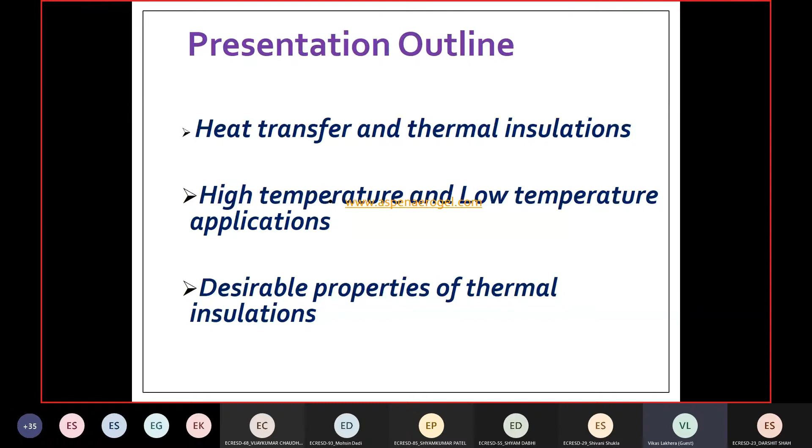This is what we all know as Fourier's law of heat conduction. Usually whenever you have a wall and you want to reduce the heat being transferred, what you need to do is play with the thermal conductivity, because the cross section area is fixed, this is a wall, you cannot do much about it, and the temperatures of the ambient and the fluid are also sometimes beyond your control. So what you can practically do is play with the thermal conductivity.

If you see this equation, you can write it as Q equals delta T upon delta X. Delta T is the gradient which is actually working here. So delta X upon K times A, this part is your thermal resistance. This is something which you like to have. If you are working as an insulator, you would like to have this higher, so that the heat...

You would like to play that role. So insulations basically work like this: the thermal conductivity is reduced as much as possible so that the resistance part increases and the heat transfer reduces.

We all know that gases have the lowest thermal conductivity, and air is something which is freely available, its conductivity is around 0.026 at room temperature. So this is the thermal conductivity of air. Most insulation materials actually make good use of air pockets.

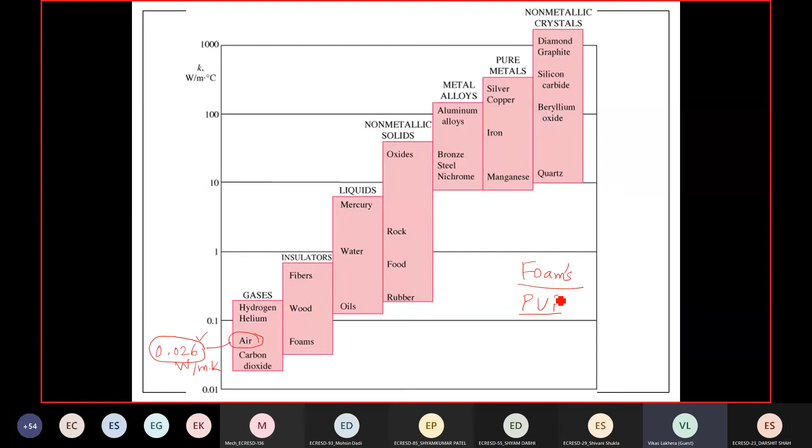If you see some of the insulations we usually use, like foams. Foam is a very popular insulation material, or PUF, known as polyurethane foam. In refrigerator doors and such, we usually go for foams, and they have a structure where you fill some gases like a refrigerant as a foaming agent. Again, gases have very low conductivity, and they are filled in plastic, you can say the base is plastic spheres in which the pocket has the refrigerant gas filled.

Because of this, foams have a very low value of K. So this is essentially using air. On the higher side, when you go for materials like wood or water, the conductivity increases.

At the same time, when you are using these foams, you have to see that there is no open structure. If the structure of the foam is open and the cells forming the foam are not perfectly closed, then water can get into this. Water's conductivity is around 0.5, so from 0.02 you are simply increasing it to that order. This is where in the application of insulations, you have to ensure that water does not get into the system.

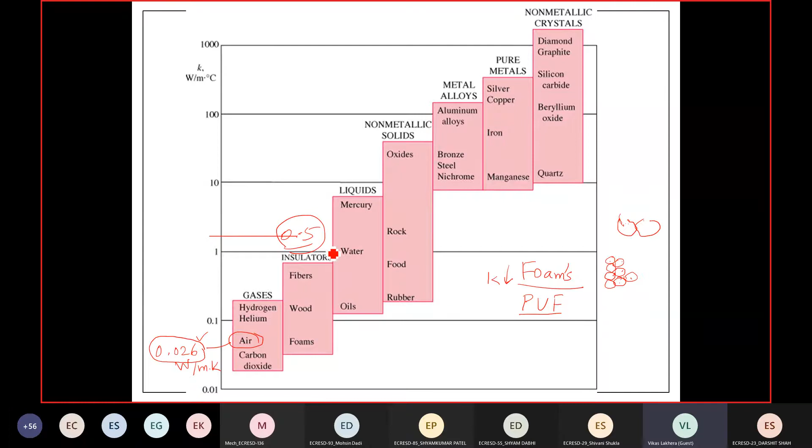This is what we were just talking about. So you have diamond, which is the highest, water around 0.6, and air around 0.02. Your foams, which have a conductivity of 0.026, principally owe this to the presence of air or pores wherein air or other gases are present. This leads to the low conductivity of the material. But again, if the structures are open, water can get into it, and that water will actually increase the conductivity of the material.

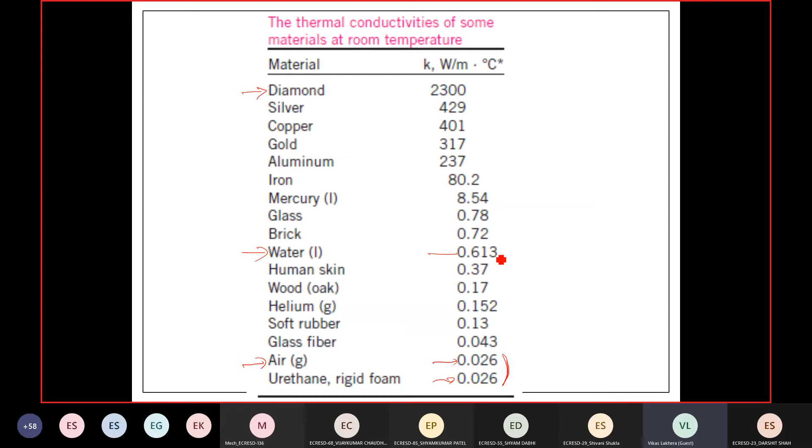So we all know there are three modes of heat transfer. Within a material, all three modes could be working at a time, depending on how the fluids are placed and how the structure is. So even radiation can sometimes play a role.

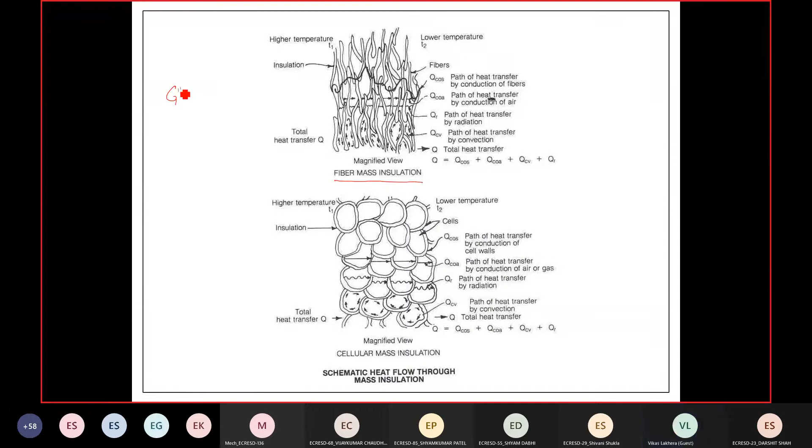So here, if you look at the structure of an insulation, take a fibrous insulation like glass wool or mineral wool - these are all fibers, basically a kind of blanket. In between the fibers you have gaps. Here there will be a combination of heat flowing wall to wall through heat conduction, plus some amount of conduction and convection through the air in between, and then heat propagates like this. So actually in any heat transfer happening in an insulation wall, you have a combination of convection, radiation and conduction. Your overall objective is to reduce all three modes through this cross section.

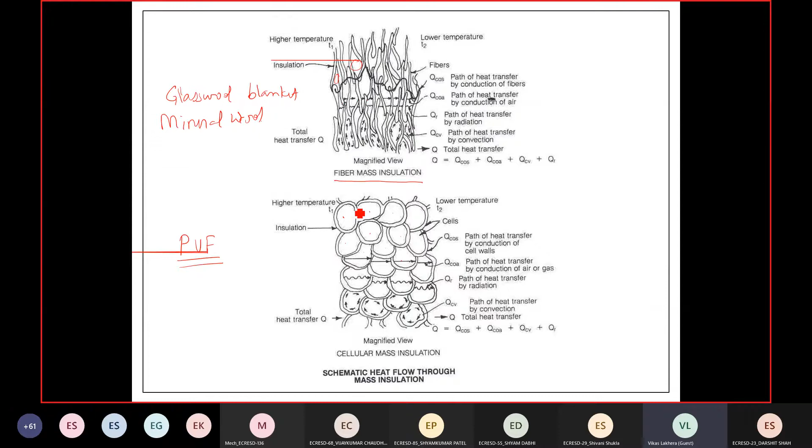So this is for a fibrous mass insulation like a glass wool blanket or mineral wool. And this is something you go for with a cellular material like PUF, polyurethane foam. The foam structure is something like this - these are the cells actually formed by the chemical structure of the PUF, which is a kind of polyurethane structure. Within it, some kind of gas is filled in between, used as a refrigerant or foaming agent, filled in this kind of structure. If these pores get opened up, again you have the problem of water getting into these structures. So if it is a close-knit structure with fewer open cells, the structure is very compact and it will not be as prone to heat transfer compared to an open type of structure.

So insulation materials, basically you can have inorganic material. Inorganic includes things like perlite, ceramic fibers, mineral wool, cellular glass - these are all inorganic materials. Then you also have organic materials, which can be natural or man-made. In the organic category you have foams like polyurethane foam, then PIR foam, isocyanurate foam, and something we usually use on our human body, like sheep's wool - that's a natural organic insulation. Then you also use cotton. So these are all the organic materials which are used there.

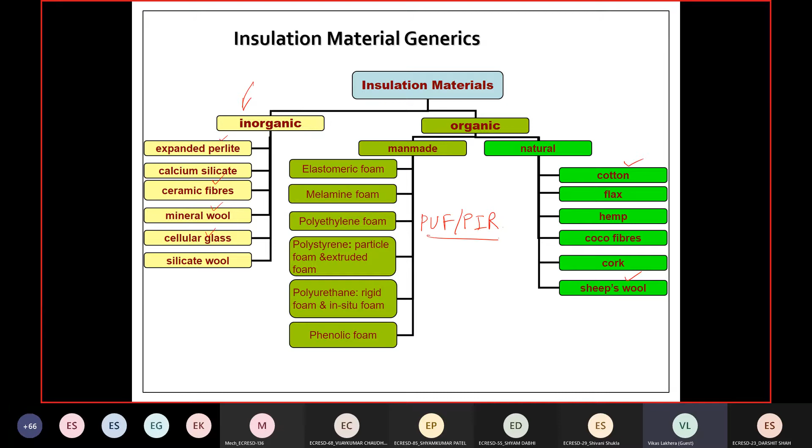Here, if we talk of the properties, one of the most important is the thermal conductivity. We use the word 'effective' because it is not only the thermal conductivity of the solid material. It is also because, as I told you, in this structure the overall heat moving is a combination of heat transferred through the fibers as well as the air and other gases which might be in between.

So it is not just the conductivity of the material per se, but it is also due to the combination of the paths which are formed, and the overall thermal conductivity is also what is known as the effective thermal conductivity. So it is not just the thermal conductivity of the solid material, but the whole insulation wall, which comprises of not only the solid fibers, but also the gaseous elements. So we use the proper word in case of thermal insulation as effective thermal conductivity.

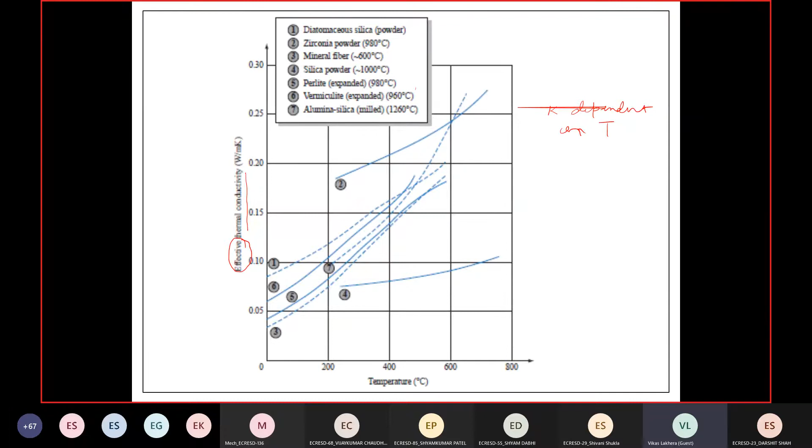So insulation may not just have one purpose. Thermal insulation, you may have the purpose of say heat reduction. So you can use it both ways. It can be for cold insulation, and it can also be for hot insulation.

So these both applications may be differing. In industry, you may find some of the cryogenic systems where you require cold insulations, and you may also have the steam lines and the steam going to the high pressure turbine. So all those are the hot insulation where you require to maintain the temperature of the fluid inside the pipes. So this is again you can have different types of applications where thermal insulation may be used.

Also another application of the insulation is in acoustics. Say for example the airports, or the theaters. So there you may use the acoustic insulation, for example near the airport. So if you are inside the airport, you may not feel the kind of noise which actually the airplane makes on the airfield outside. There are so many airplanes landing and taking off, but still within the airport premises you don't feel it because of the insulation which is used.

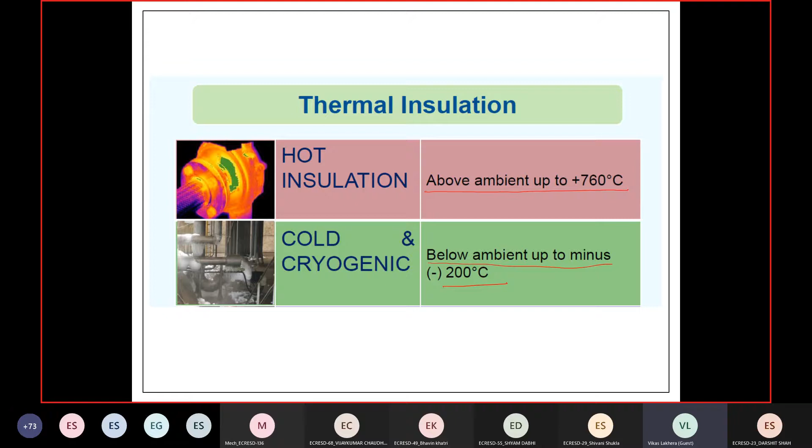So as I was telling you, you can go for thermal insulation. Usually hot insulation is above ambient, and you can go up to 700 plus temperatures. And if it is cold and cryogenic, you can go for below ambient, up to minus 200. These are typical ranges, but of course they are only indicative ranges.

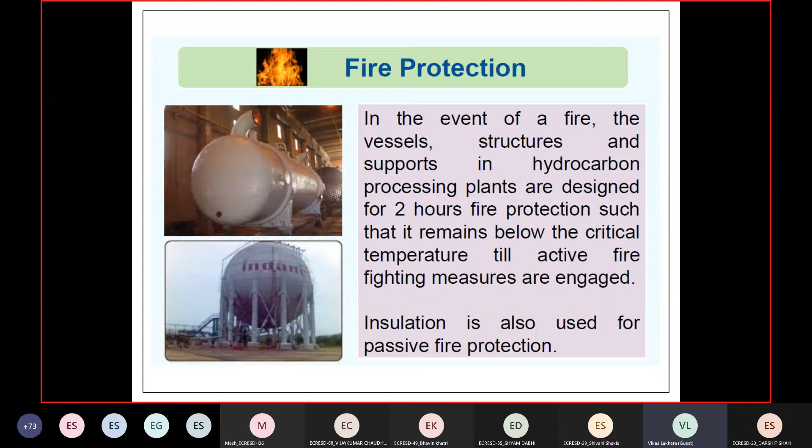For fire protection, in the event of a fire, your vessels, structure, and supports should be designed for at least 2 hours fire protection so that their critical temperature is not reached. Otherwise, before the firefighters come, the structure should never reach the critical points, otherwise there can be disastrous results. So insulation is very effective in that kind of passive fire protection.

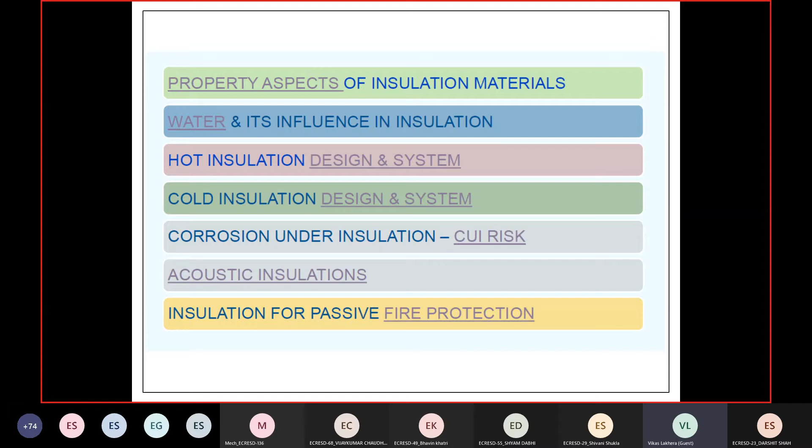What is important is the property aspects of insulation material, what water can do. As I told you, water's conductivity is much higher, maybe more than 20, 30 times that of air. So it will cause very disastrous results if it gets into the system. You have to see that water is not getting in the system. Air conductivity is around 0.026 and water is around 0.6, so between the two you have a factor of around 30 times.

So this is something you have to see: if you are designing a system just with air pockets, the cellular structure, if water gets into those structures, it can lead to a lot of heat transfer, and your entire thermal management will fail. Then you have special characteristics for hot insulation and cold insulation.

Another important aspect which people often miss is the corrosion aspects. This is important because once you have placed the insulation, you will not open it in the lifetime of the insulation. Maybe you will open it after 5 years, 10 years, when the insulation has become old and you want to replace it. At that time you might find certain properties like corrosion under insulation, known as CUI.

This is very risky and can lead to corrosion of the wall. Typically, if austenitic steel is there, and the amount of chlorine or sulfur content in the insulation is not appropriate, it can cause the wall, especially metallic walls, to corrode. This is an issue because you will not know unless you open the insulation, and once put in place, you usually do not open it periodically, even for cleaning. Unless the insulation is bad and has collapsed, we do not usually replace it. But because it is hidden, it can silently cause corrosion.

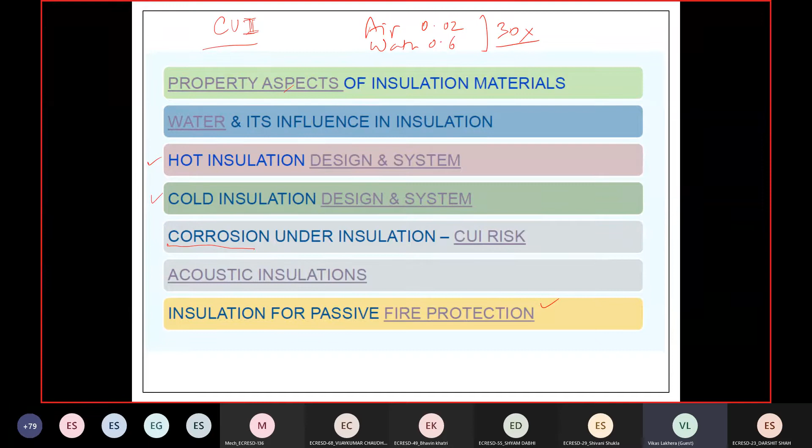Here the design objectives: one is energy conservation, that is the prime thing, and the logic is simple. If you have a pipe, and over the pipe you put the insulating wall, you are creating additional resistance. So the value of overall heat transfer coefficient U will be affected because of the presence of the wall. But at the same time, you have to see that Q is equal to U into A into delta T.

So if you are using a thick layer of insulation for a pipe, the area is also increasing. If you are having a very effective insulation, suppose instead of using this, insulation type 1 has say 10 centimeter wall thickness, so delta D is 10 centimeter, this thickness is say 10 centimeter. So what you have done, your outer area is increased because of this.

Suppose for the same wall temperature, you are able to maintain delta T the same using only say 2 centimeter wall. So if your thickness here is just 2 centimeter, this area will be much larger as compared to this area. Even though wall temperatures outside of the two surfaces are the same, for the pipe, this material, type 2, requiring only 2 centimeter, is able to create the same thermal resistance as a 10 centimeter wall because of having a very low thermal conductivity.

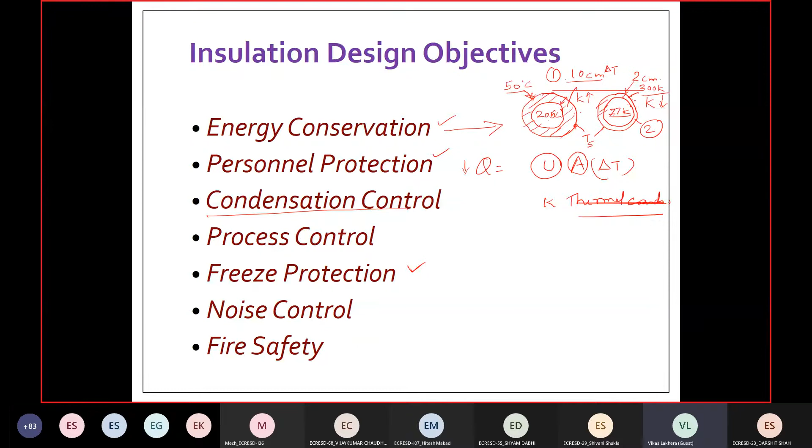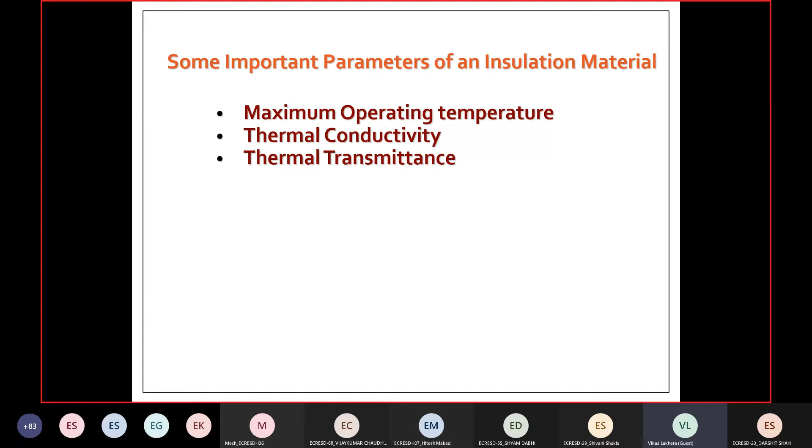So what are the important parameters of an insulation material? One is the maximum operating temperature to which an insulation can be used. Then the thermal conductivity of the material, and thermal transmittance. Thermal conductivity and transmittance, though they are linked, are not the same, because here you also consider the overall factor. So when you are taking U into account, you talk of the thermal transmittance.

Otherwise, you're only taking K. As you know, the overall coefficient depends not only on K, but also on H, that is the convection coefficient. So you require to consider that. Then the water vapor permeability, how much the insulation is permeable to the water vapor.

Usually the water vapor will have a gradient. Say if you are taking a cold storage, for example, this can be a very severe issue. Suppose on one side of the cold storage you are maintaining a temperature of minus 20 degrees, and on the outside ambient you may have a temperature of say 25 degrees.

So this is ambient and this is cold storage. The water vapor on this side is at a different gradient as compared to the other. So there will be a movement of the water vapor from the plus side to the minus side. So how much the wall is permeable to the water vapor is a very relevant property, especially for cold storage.

So what will happen is, if water penetrates the wall of the cold storage, then the water's conductivity is say 0.6, and you have designed the whole wall considering the insulation to be effective. So your load for the cold storage is designed as per that. But now water has entered, and water will replace the air pockets inside, which were earlier having a conductivity of 0.02. Now the water has replaced it, and the wall has become conducting.

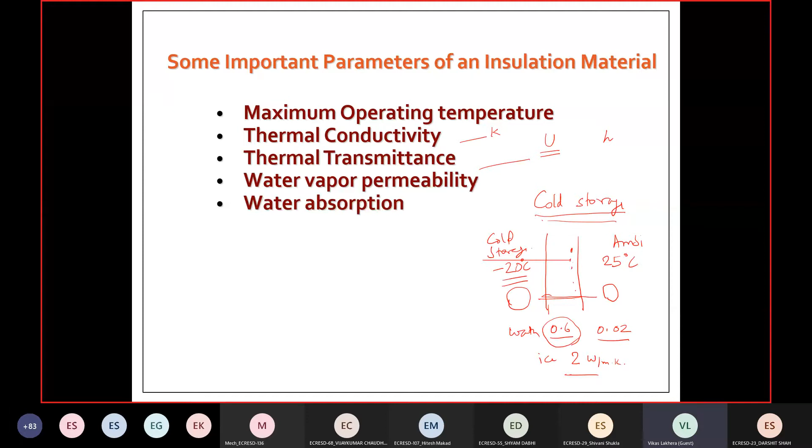How much absorption of water takes place? So absorption of water is again, as you can understand, important.

Fire resistance, we just talked about it. Smoke properties are also important, because when an insulation catches fire and burns, it produces very toxic smoke, and that toxicity, especially in residential and this kind of buildings, can have very serious repercussions.

Then the compressive strength, because usually in cold storage and other structures, you will have a whole wall created of the insulation material. So these walls will have a load, and this load will be of compressive nature. If the insulation is not very strong, its compression properties will not be sufficient, so you should know how much compressive strength it should have. It is good to have a good compressive strength, especially when you are using it for buildings where loads will be coming into it.

Resistance to vibration and jolting becomes crucial, especially in automobiles and those kind of structures. Say for example, you are using it in trains. Trains are continuously vibrating.

So the railway bogie, the air conditioning coach is there. Usually to reduce the air conditioning load, you use insulation in the walls, so the whole wall of the coach will have insulation in between. So there will be insulation here. Now this is continuously vibrating, because the train is moving, so it will always be vibrating.

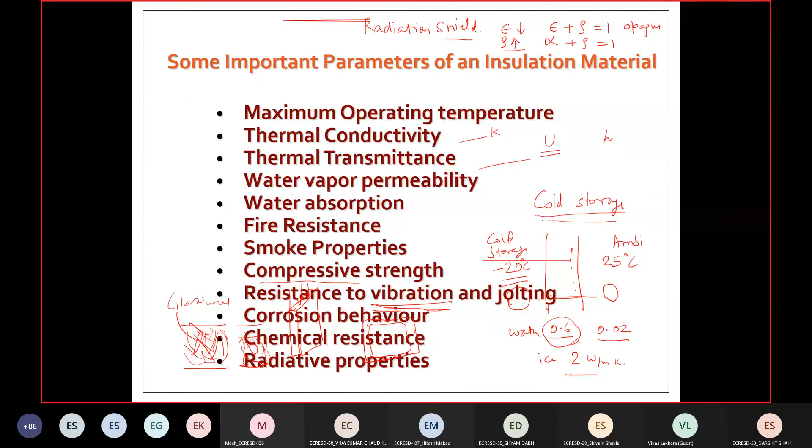So if you talk of the various properties of the material, you have the thermal properties, physical properties, chemical properties, moisture properties, combustibility properties. These are very relevant and you need to appreciate this. Again, it will also depend on the application. For different types of applications, you may require different types of properties.

You see, water absorption may not be very critical for high temperature application. Why? Because even if water gets into the system, since you have a high temperature fluid inside the wall, the water will eventually evaporate out.

So this is something which is very crucial for cold insulation. How much water vapor gets in, how much water it is absorbing, is very crucial for low temperature insulation, because once water gets in, it will not be able to come out, and it will freeze and become ice and start highly conducting. But in the case of high temperature application, if water gets in and the temperature of the fluid inside is 150°, the water will eventually evaporate and come out. So you only have to see that there are enough path lines available for the water to come out.

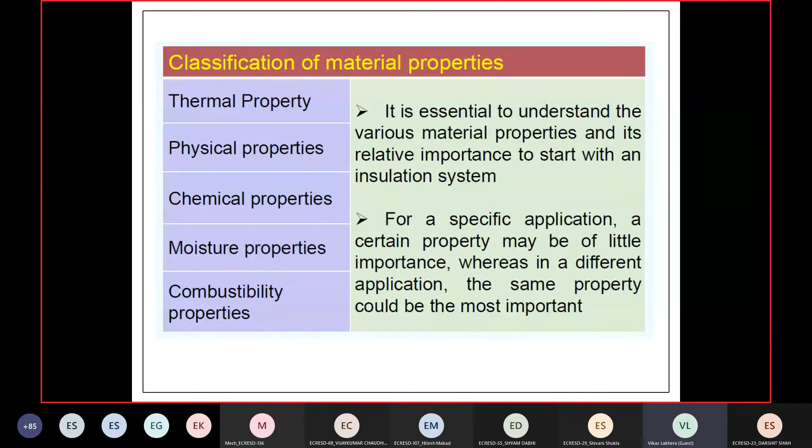So likewise, other properties are also very relevant, and depending on the application you have to consider them. Your thermal properties include temperature limits, thermal conductivity, and how much it expands. That is also important, because if you are putting it on a pipe, the differential expansion and the expansion of the thermal insulation you have put are also very relevant.

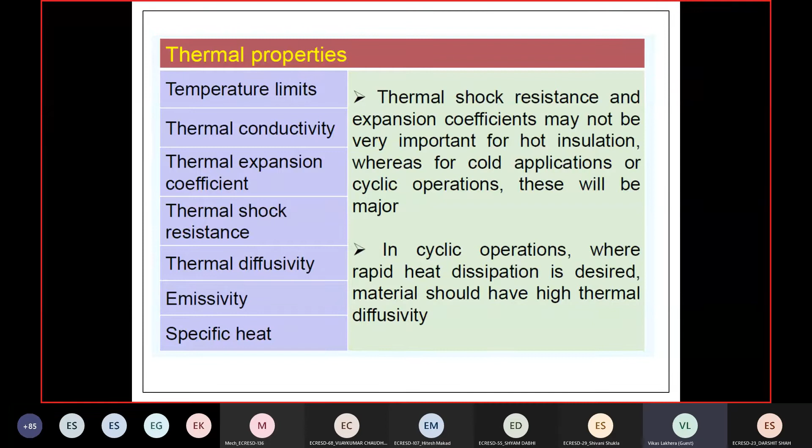Thermal shock resistance, thermal diffusivity—so how fast it is able to come down to its original temperature, and how fast it wants to cool down, that is related to the property called thermal diffusivity. Then the emissivity of the surface, again related to reflectivity, and the specific heat. So these are some of the thermal properties we look for.

Similarly, if you talk of the physical properties, it is how many open and closed cell structures are there. We just talked about the open and closed cell. It is relevant because that is how the path lines are decided inside the insulation. Then whether it is fibrous or rigid, its resilience, resistance to vibration, tensile strength, flexural strength, compressive strength. Flexural strength is something related to breaking.

Suppose you are having a sample like this, and you are having a load in the center, for example, and it is like a structure like this. At what load will it usually have sagging? So when you load it like this, it is under flexion. At what load will this bend and break? That is known as the flexural strength. So in some cases, depending on the way you apply the insulation, this may also be relevant along with the compression.

Then chemical resistance includes what is the pH value, leachable chloride, because that is what leads to corrosion. Then moisture properties: how much water vapor it is transmitting, what is the water repellency, water absorption, and the hygroscopicity—how much it is able to absorb moisture from the air. So all these things determine the moisture properties of the insulation.

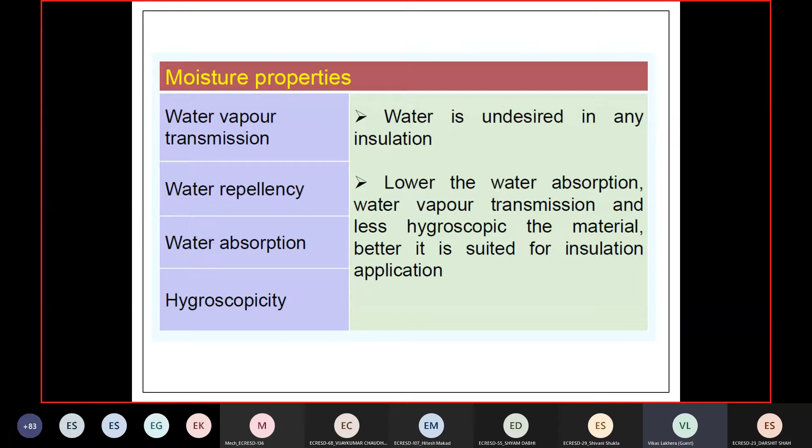As such, we all know that water is not desirable. Then flame spread index—in combustibility, this is how fast the flame spreads in the material. And the smoke and its toxicity—how much smoke it is developing, whether the smoke is toxic or not, how fast the flame is spreading, and whether it is self-extinguishing. You fire the insulation, and if you stop the fire, the insulation should not promote the fire, it should not burn itself down. So if the self-extinguishing property is there, that is a desirable property in the insulation.

So even if one section of the insulation catches fire, it should not promote or propagate, it should not go ahead, and it should not burn down the whole structure. So it is very important to have a self-extinguishing property and a low flame spread index.

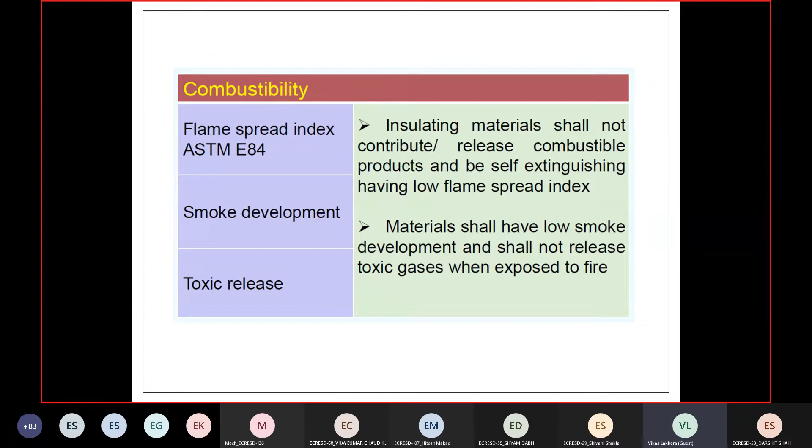So today, these are the normal insulation materials. What we were using is glass wool. Similarly, you have mineral wools. Mineral wool is a very generic word, so glass wool and rock wool are both a part of that. Then you have ceramic blankets, usually used for very high temperature applications like furnaces. Why? Because glass wool and mineral wool usually have binders, and these binders are volatile.

Once the temperature goes to 600, 700 plus, the binders will evaporate, so this material will become loose. So glass wool and mineral wool blankets will actually lose their strength once you heat them up too much, because these binders will become volatile.

So ceramic wool blankets are usually used in furnaces. You see it is a white color blanket, so they are usually white in color. And if you open the door of a muffle furnace in your lab, you will see that there is a ceramic blanket inside. This can very easily go up to 1000 plus temperatures.

And then on the cold side, we usually go for polyurethane foams, PUF, PIR. These are some of the insulation materials which are very widely used at low temperature. You can also use glass wool as such, though on the closed cell structure, the PUF and PIR are very popularly used. These all have conductivity in the range of 0.02 watt per meter Kelvin, so the PIR foams are usually having 0.02.

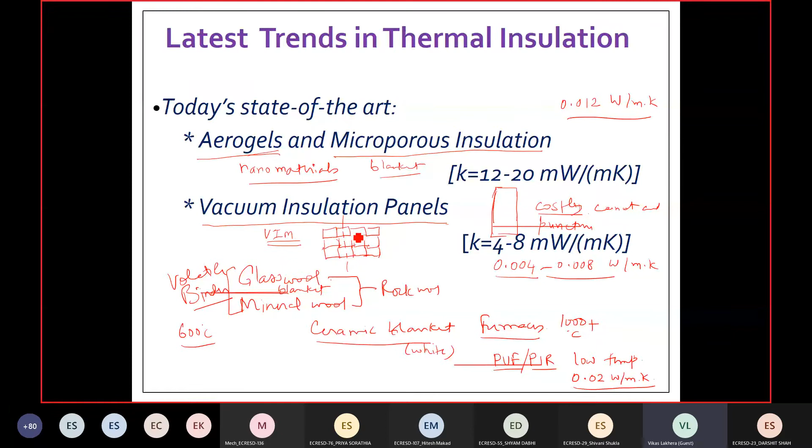So right now they are trying to work it out. For example, instead of having a single panel, you can build a modular structure, so if you want to cut it, even if you cut it here, the structure remains intact. So you can cut it also, only some part will be lost, but the entire structure will not fail. This is what they are calling vacuum insulation material. So instead of a whole single panel, you can have small structures within, and these you call vacuum insulation material. You can cut them without breaking the whole panel if you cut it partially.

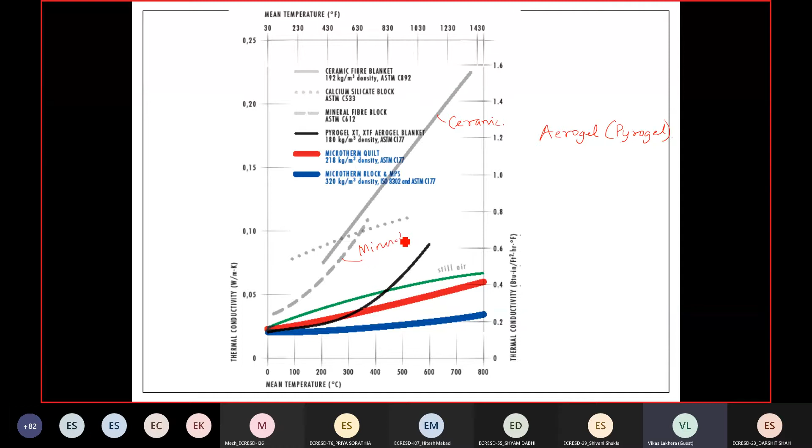This is the ceramic fiber blanket, and this is the mineral fiber which you usually use, like your glass wool and rock wool, so this is your mineral wool. And this is your aerogel. This is what is microporous insulation. Microtherm is a trade name, and it's actually a microporous insulation.

Microporous insulation is also a kind of nanomaterial like aerogel. Aerogel was first developed by a company called Aspen, and slowly other companies also got into it. Aspen was developing this mainly for NASA applications, and later this technology became more commercially applicable. Aspen's spin-off labs were developing this for NASA applications, but nowadays many companies are making aerogels, and it is commonly available for commercial applications.

You can use it in jackets. Its conductivity is very low. As compared to your conventional wool, which has a certain conductivity, suppose you are working in the temperature range of 100 or 50 degrees. At 50 degrees, its conductivity is here, whereas the conventional mineral wool is here. So it is almost half, or in that range. So if you require a thick layer of mineral wool, with aerogel you can work with a smaller layer.

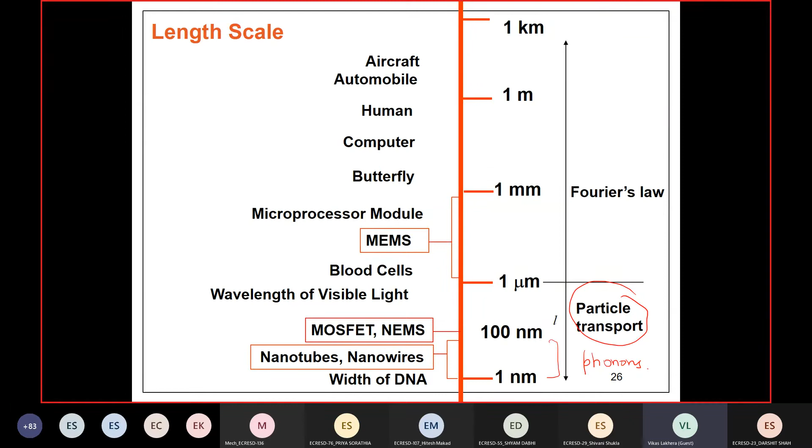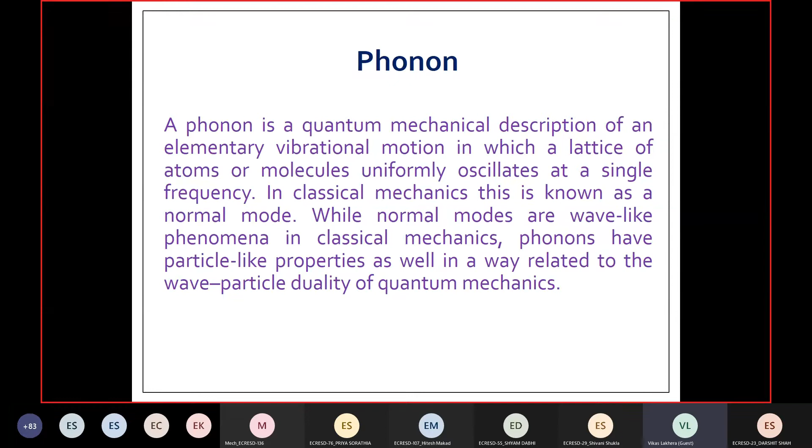In this range you have what is known as particle transport, working through what is known as phonons. At this structure the rules of physics change, and the energy transferred is also through the phonons. The lattice structure vibrations can be viewed like a particle, and also like a wave. This particle-like behavior in phonons, and the vibration continuously happening along the lattice structure - a phonon is actually a quantum mechanical description of an elementary vibration motion in which the lattice of atoms or molecules are uniformly oscillating at a single frequency, as shown here.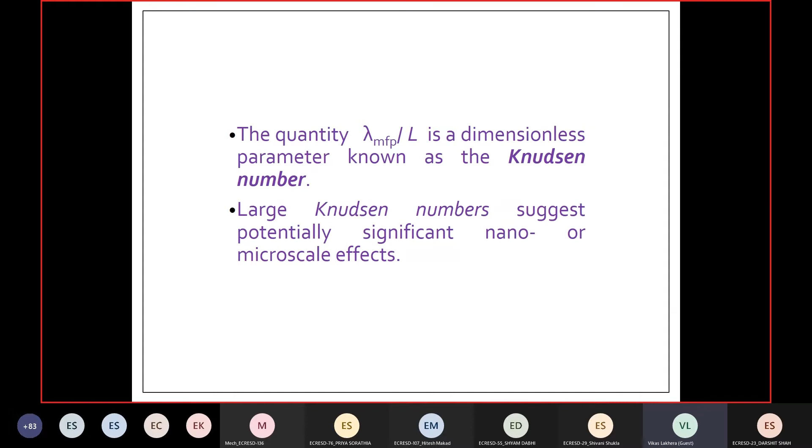In the case of a thin film, there will be a mean free path. In this case the mean free path will be small, so in this case it will be larger as compared to the length here, which is very small as compared to the length here. So this is where the effects of nanoscale come into picture, and the mean free path lambda divided by the dimension L is what is known as the Knudsen number. If you have a large value of Knudsen number, it means you are potentially working in the nano or micro scale effects, where the physical boundaries change in that structure.

The kinetic theory suggests that the thermal conductivity expression is given by this, where this is the lambda mean free path. If you can manage this lambda of the mean free path of the phonon, then you can lower the thermal conductivity. This is what is used in nanotechnology, and this is what you are doing when creating aerogel or microporous insulation - playing with this mean free path, and once you reduce this, your conductivity also reduces. So if you want to control or increase K, you should increase this lambda, the mean free path of the energy carrier - that is how you control thermal conductivity, and this is what aerogels do. Otherwise, the lowermost limit is constrained by the mean free path of the air molecules. But you can go beyond that by using micro or nanoscale effects.

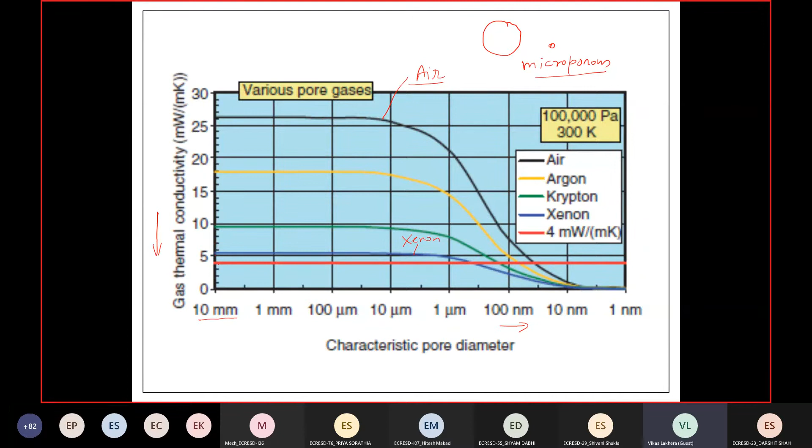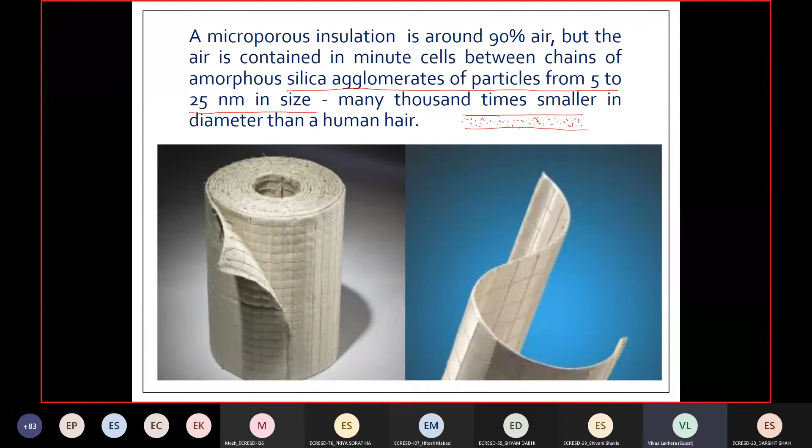So what they do is use a fabric like this, and in this fabric you have all these 5 to 25 nanometer size silica particles in which the air or gases are trapped. This is what is known as microporous insulation. Of course, the techniques required are very specialized and not available easily, that is why this is costly. You can use it up to a temperature of around 1000 degrees, and they are very flexible, so you can create it like this.

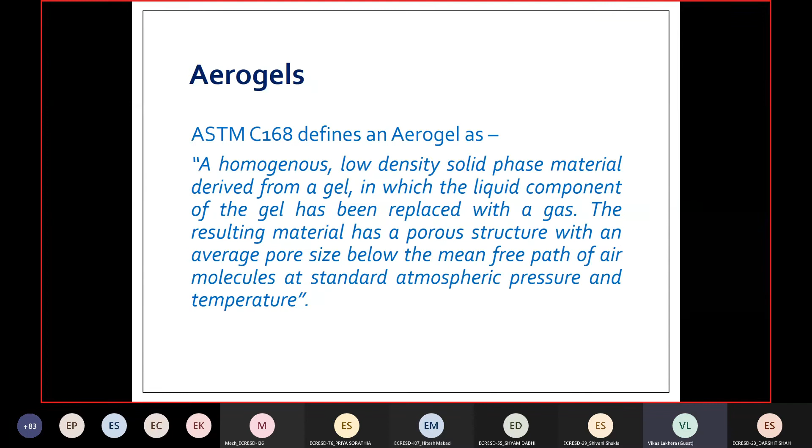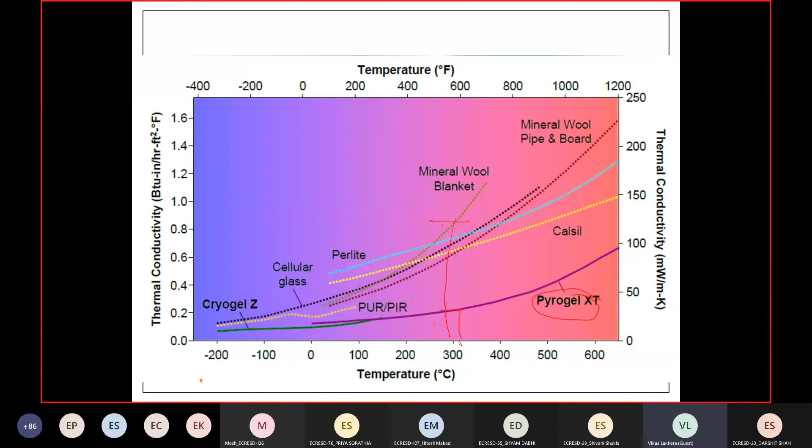So this is how the characteristics are: your pyrogel is here, and this is what the conventional mineral wool blanket you are using would be. Compared to pyrogel, you can see how the characteristic of the insulation is - if you require this much thickness of mineral wool, you can work with this much thickness of pyrogel instead. So there is a lot of reduction in the outer diameter of the pipe. Especially in pipes, it is very effective because your outer surface area will be reduced, since that is where you are losing heat. So even though wall temperatures are the same, the area of the outer cross section is going to be lower when using pyrogel as compared to mineral wool.

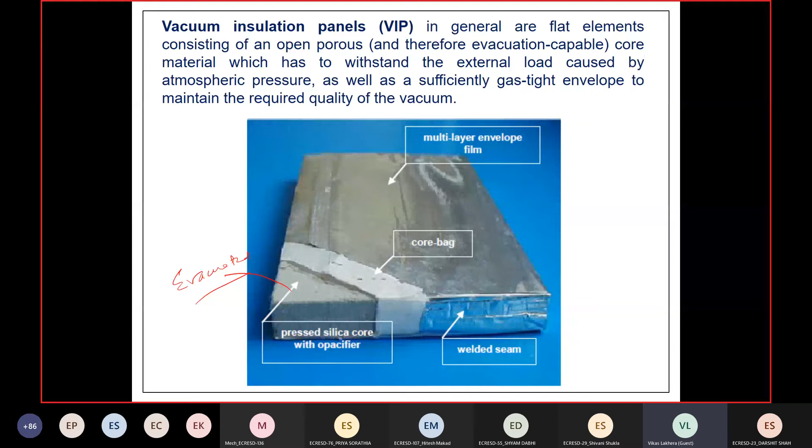This is the range of conductivity you are able to get: around 0.004 watts per meter Kelvin. That is almost 10 or more times lower than the lowermost you can get from other insulations. So vacuum insulating panels, though costly, perform very well.

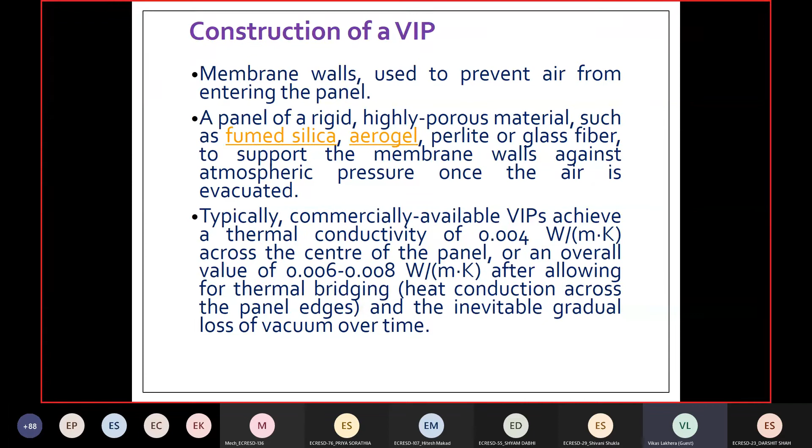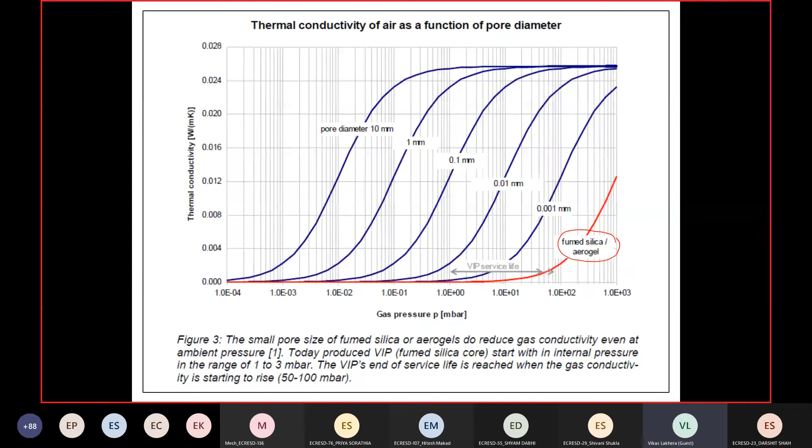Water is something you don't want - you now know why. It promotes corrosion, increases energy loss, and reduces thermal efficiency. So you don't want water to get into it. Thermal efficiency usually reduces drastically because water in cold insulation ultimately forms ice.

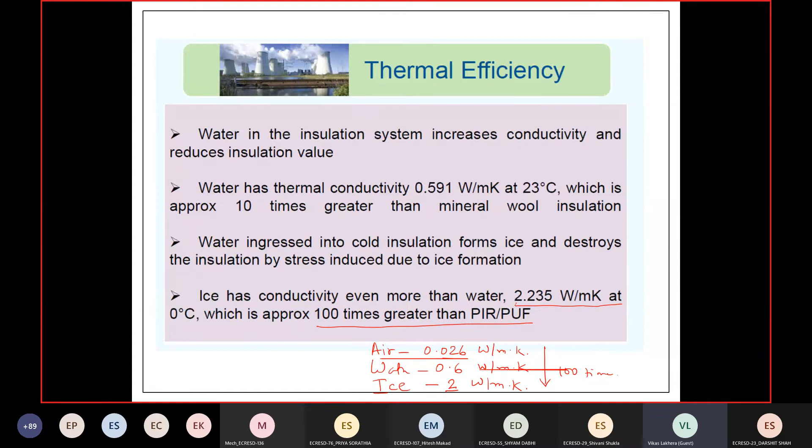This is where you have to ensure water is not getting into the system. If water gets in, the conductivity increases, and the walls start conducting heat. If it's cold insulation, you require a higher refrigeration load; if it's ambient conditions, you require a larger air conditioning load.

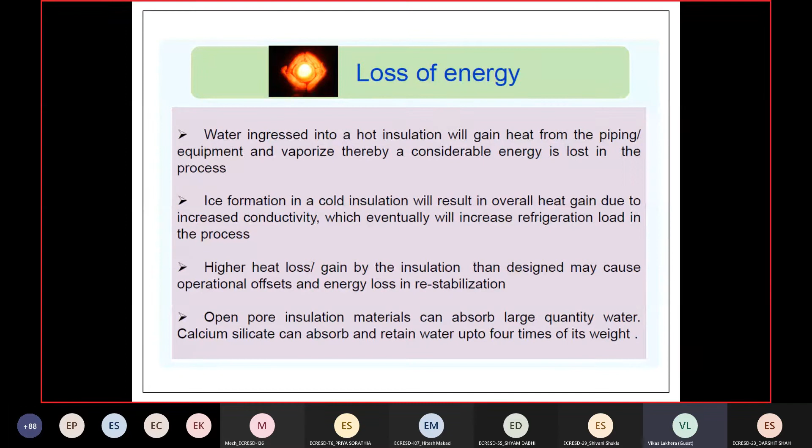This is why you don't want corrosion under insulation - as I already mentioned, water promotes that, and alkali and other things will also promote it. For hot insulation properties, the objectives are energy conservation, process temperature control, and personal protection. Here water entering is not as important, because at high temperature the water will evaporate eventually.

But in the case of cold insulation, this is a very important thing. The other thing you have to take care of in hot insulation is leachable chloride, which will actually cause corrosion under insulation. This is a very important part you have to ensure.

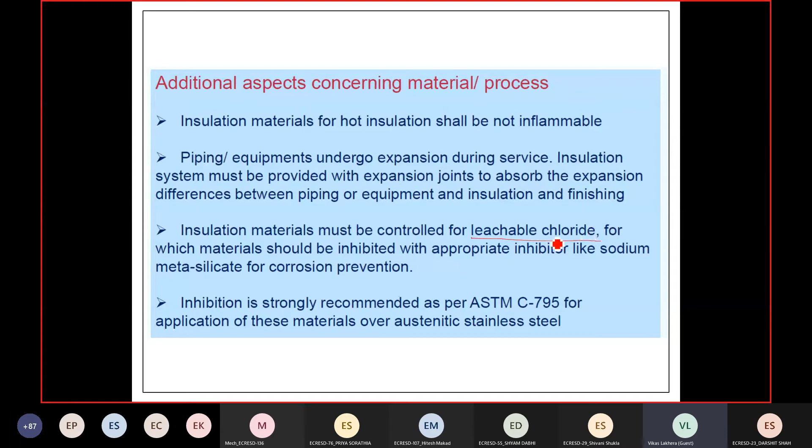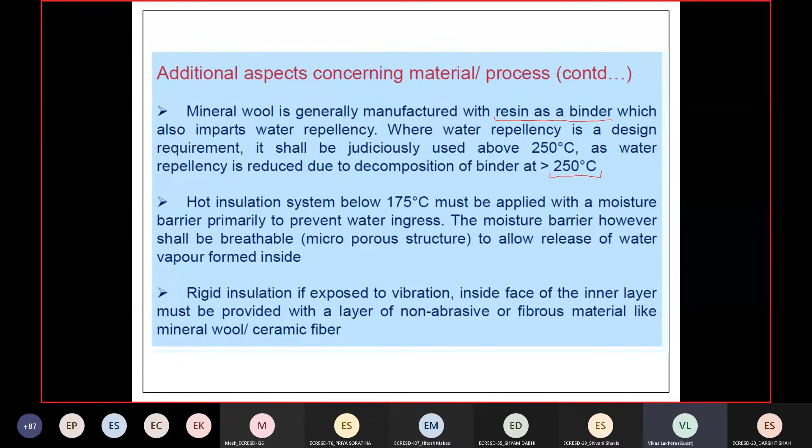The other thing is mineral wool, which usually has a resin as a binder, and this is a volatile material. As the temperature goes above 250 degrees, these volatile binders will evaporate, and the whole wool will become fluffy. There is a way how they address this - I'll tell you briefly.

This is how you work out the effective insulation thickness. If you increase the layer of insulation, the cost of the whole thing will go up, but your energy loss also reduces as the thickness increases. Eventually you have to see how much cost the heat losses bear to you, and find the break-even point where for a particular thickness you get the lowermost overall cost.

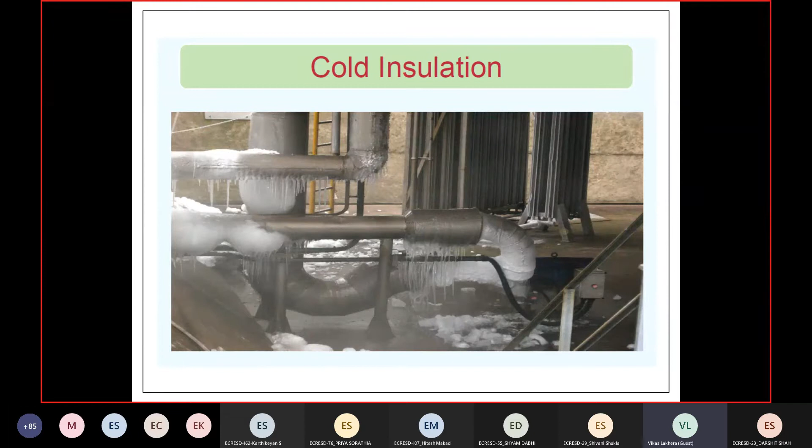Then these are some of the additional things. We'll skip this part, cold insulation - you just got the idea about it. In cryogenic systems you will use it. Here your objective is basically to conserve the refrigeration, control the boil-off rates and temperature of the processes, prevent surface condensation and ice formation, and of course provide personal protection from cold burn.

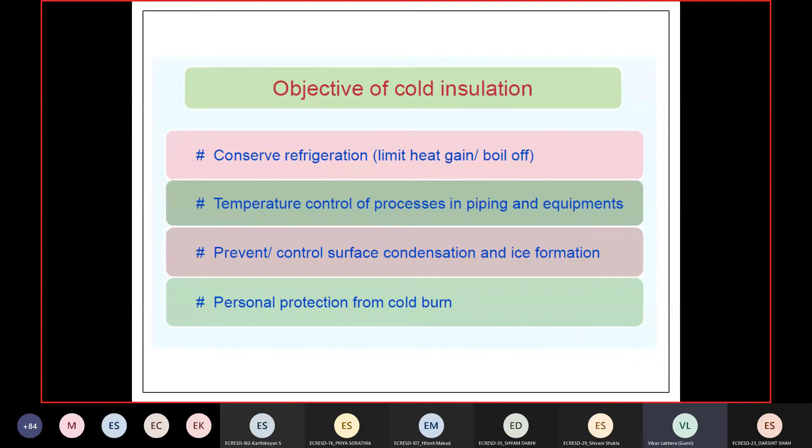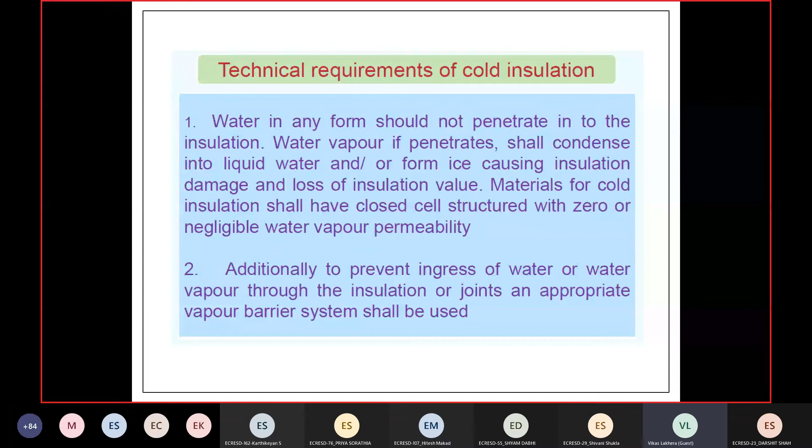So here what is most important is that water should not get inside your insulation, because if water gets inside the insulation it will definitely damage it, and how it does that we already discussed. So you have to ensure that nowhere is there a problem of water seepage. Also, piping and equipment in cold service will undergo contraction, and some part may be under ambient conditions, so how relative expansion and contraction take place is very important.

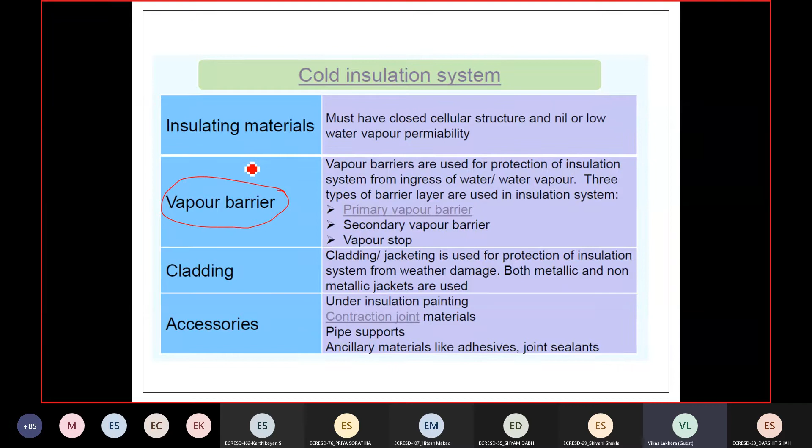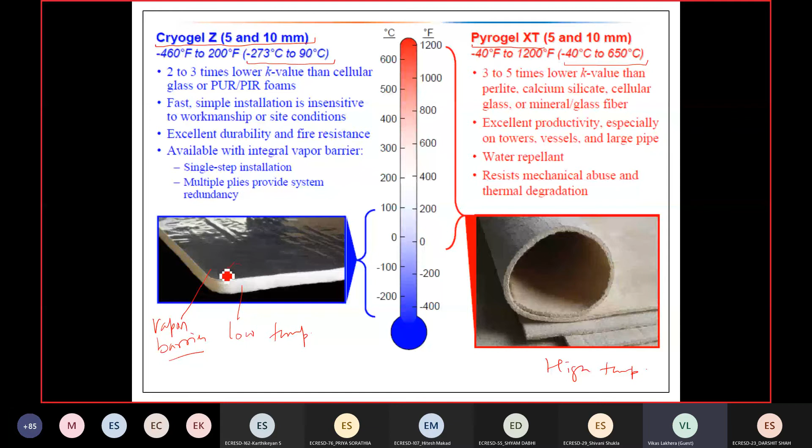So the cold insulation system usually also requires what is known as a vapor barrier. This is one of the very important parts of cold insulation. As I just showed you here, this is the vapor barrier you have put. This is cold insulation with cryogel. You don't want moisture to get in, so you have used this as the vapor barrier. Though in hot insulation it is not there.

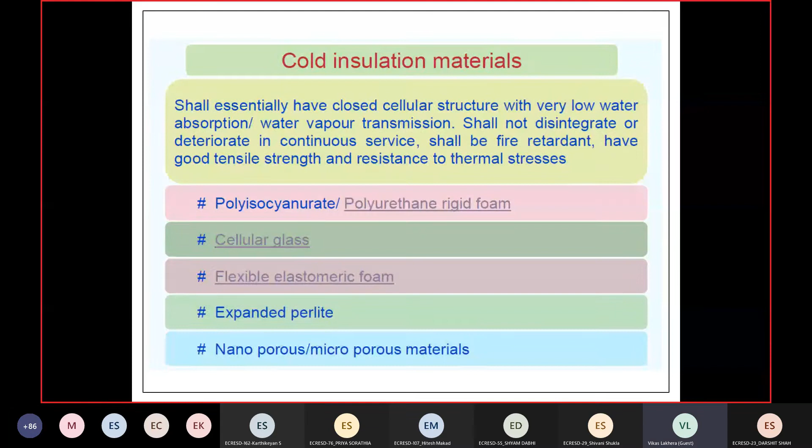So CUI, just as I explained to you, this is how corrosion under insulation happens. Okay, fire protection, very important. I'll discuss it briefly in the case of some applications, how fireproofing and fire protection is important.

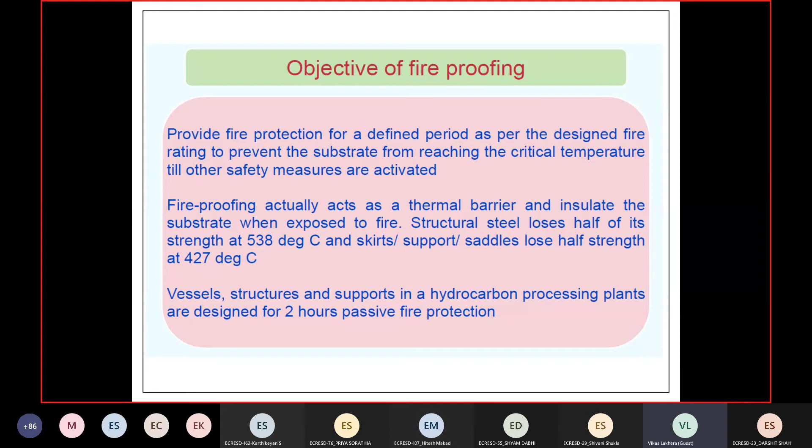So what you can actually do in this case, also in hot insulation the same thing applies. When high temperature happens, suppose a pipe having 550 degrees Celsius, if you put mineral wool, the mineral wool has its binding material or volatile binder. This binder actually keeps the blanket in proper shape. This zone is known as the burnout zone, because in this zone the volatile material will evaporate. So over a period of time this whole thing will lose its strength. So though you have put the mineral wool blanket here, over time it will become loose because of the high temperature.

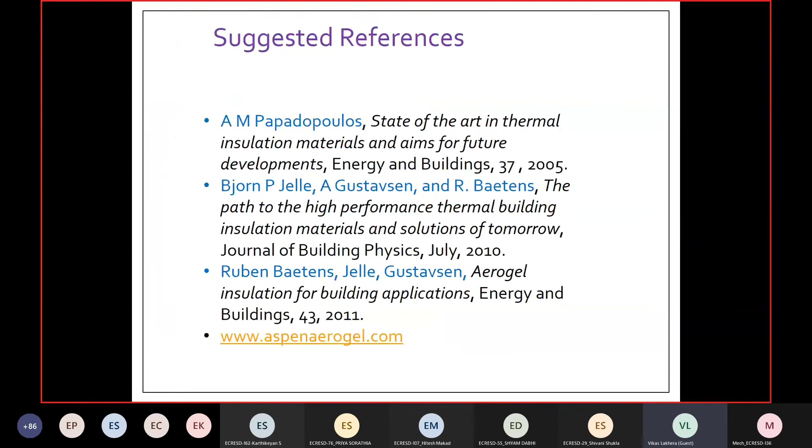So this is something we can conclude for today's session. I'll have some 2 or 3 small videos which I will share with you after the conclusion. So one thing is that thermal insulation materials are the key tool in designing and constructing energy efficient, energy thrifty systems.

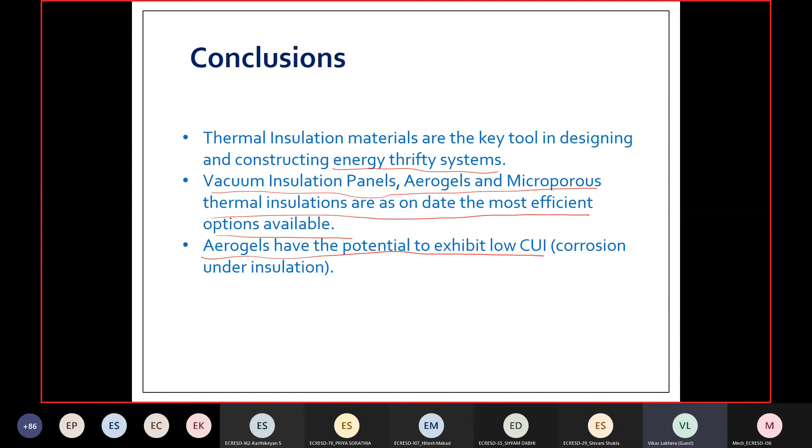The vacuum insulation panel, aerogels and microporous insulation are, as on date, the most efficient options available. Aerogels have the potential to exhibit low corrosion under insulation, and they are very sturdy. So this is something we can conclude from this session, though they are expensive. Aerogels are expensive, but how you can optimize, I already told you.

So let us see some of the videos before we close, and I'll come back to some quick questions afterwards.

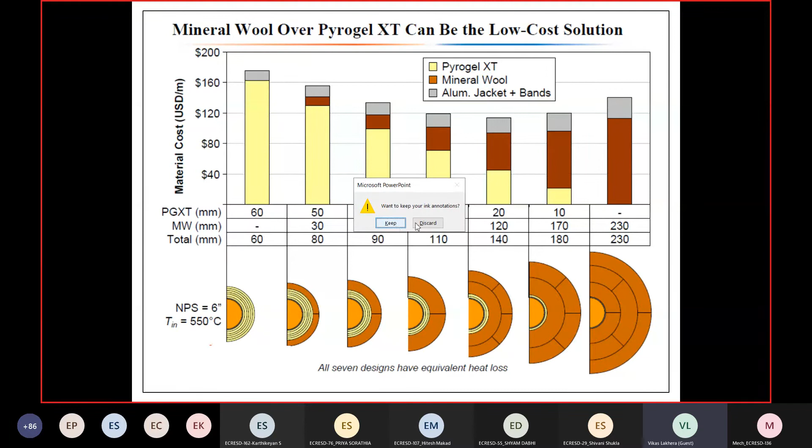So the first video which I want to play is about aerogel. What exactly is aerogel?

From insulating astronauts in space to crude oil 10,000 feet below sea... the video is not playing. Is it Aspen aerogel? No, the video is not shown, sir. It's not visible. Okay. Sir, you have to stop sharing this presentation and then share that video again. Okay, I got it. Has it stopped? Yes, sir, the presentation has stopped. Okay. Just a minute. So do I need to? Is it showing now? Is it visible? Yes, sir. Yes, sir. Okay.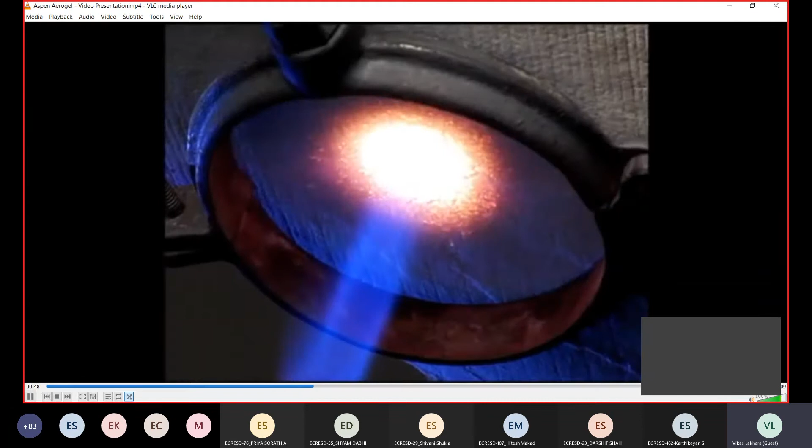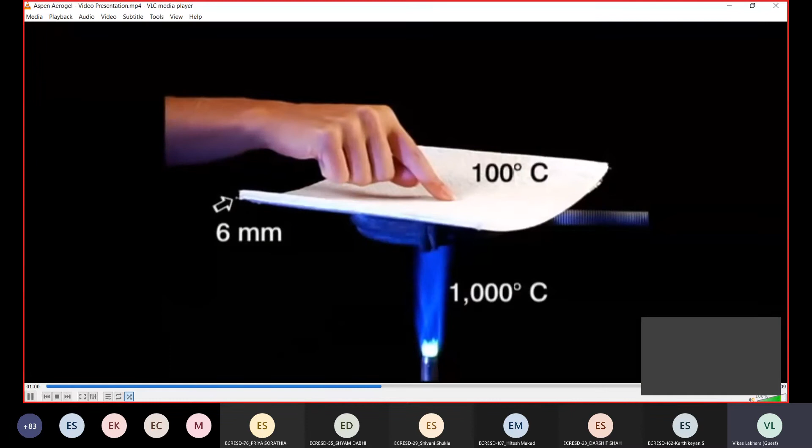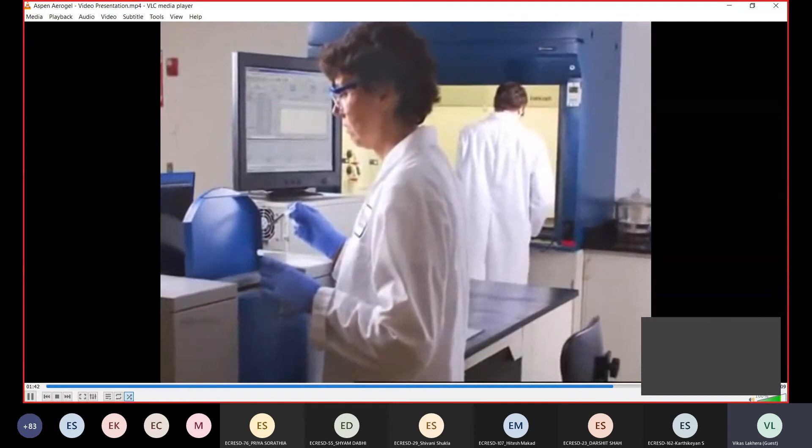From insulating astronauts in space to crude oil 10,000 feet below sea level, Aspen Aerogels is the recognized leader in aerogel insulation and energy conservation. Aspen's leadership stems from its patented nanotechnology that converts the aerogel into a practical, flexible blanket. These blankets are quite simply the best insulation available in the world today, offering 2 to 8 times better performance than any other material. To demonstrate the amazing insulation effectiveness of Aspen aerogels, let's look at the temperature change between an oxyacetylene torch with a flame temperature of 1,000 degrees Celsius and the other side of a 6 millimeter Aspen aerogels blanket, just 100 degrees Celsius. The insulating performance is just as phenomenal at low temperatures. Let's see the temperature change between this block of dry ice at minus 78.5 degrees Celsius and the same 6 millimeter Aspen aerogels blanket, room temperature 22 degrees Celsius. Aspen is already conserving energy and improving performance in oil and gas pipelines, natural gas ships and storage facilities, industrial and refinery operations, as well as defense and aerospace, appliances and apparel. Today, Aspen scientists are creating more innovations that will result in new levels of energy efficiency and value for building, automotive and acoustical applications. Nanotechnology at work.

Okay, so this was about the aerogel. Now, many times we do not understand exactly how crucial the effect of insulation is in hydrocarbon and other facilities. So let us look at an accident that happened in a refinery. Just have a look at this.

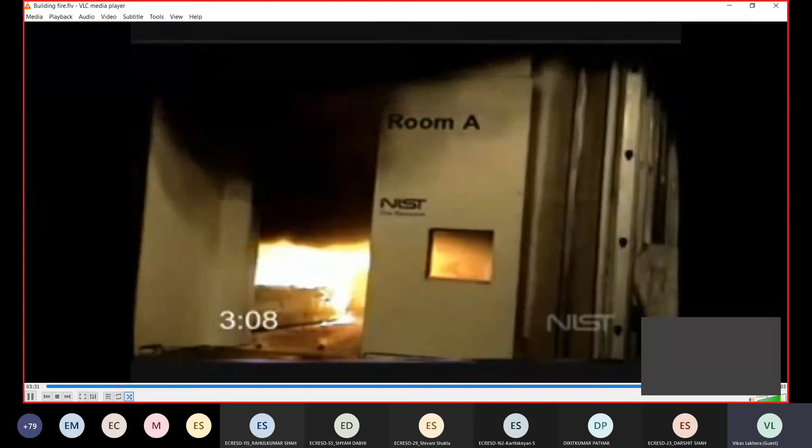This is the situation at 3 minutes - practically you don't have much time in a situation like this. This is 3 minutes 20 seconds, and see, the entire room is on fire.

And finally, the last video which I want to play is... stop sharing.

So there was actually an incident in the US, in Rhode Island. There was a nightclub there called Station Nightclub, in February 2003.

A rock band was playing, and in that building they had used insulation on the rooftop for acoustic plus thermal application. The foam used in the building is not uncommon - foams are very widely used in buildings for air conditioning, reduction in heat load, and also for acoustic purposes.

So how did the fire actually happen? NIST recreated that scene, and you can see this.

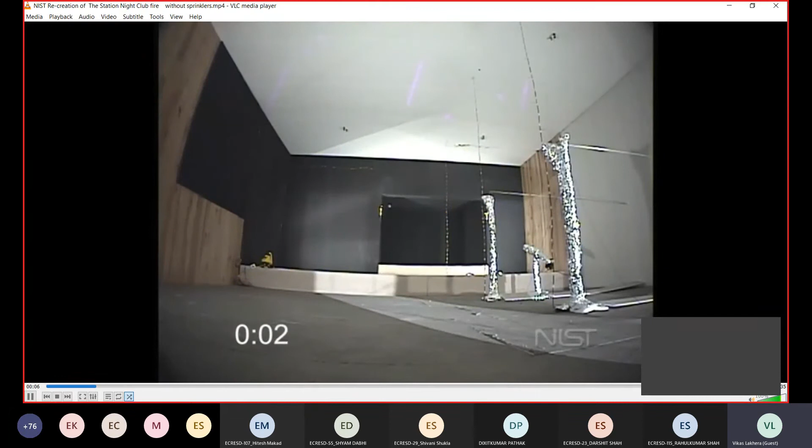Is the video visible? Yes sir, okay, so now here, visible - here at this end, the fire catches up because of the pyrotechnics.

Now see, the entire wall is made up of foam. It is just 20 seconds before people actually realize smoke is also coming - within 20 to 30 seconds, you see. This smoke also makes visibility very poor.

In the case of thermal insulation, especially for buildings, you have to be very cautious of fire properties. Usually rock wool and mineral wool are safe as far as fire is concerned, but polyurethane foams are very susceptible to fire. So you have to ensure fire retardant chemicals are used in the construction of the foam material.

You see, in less than 1 minute, this is the scenario. This is 1 minute and 20 seconds.

Sir. Sir, hello, sir.

So this is 1.5 minutes - see, the whole thing has gone black. This is what may have happened on that day.

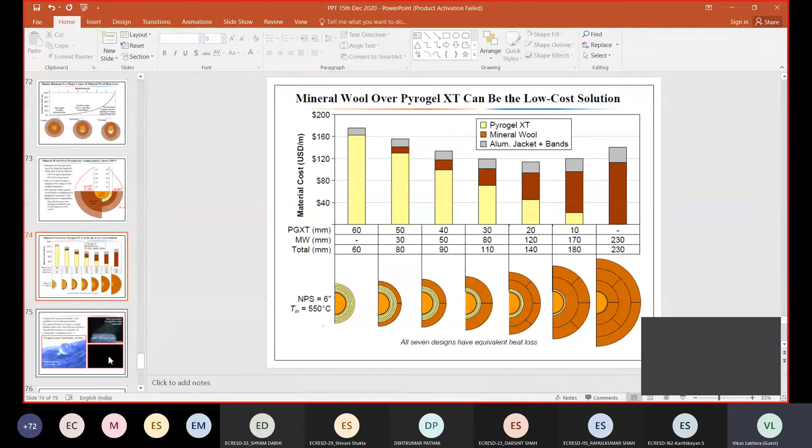Sir, yes. Sir, thermal conductivity is directly proportional to the mean free path, right? Right, right, so we can say that. So we can say that the mean free path is also affected by the temperature.

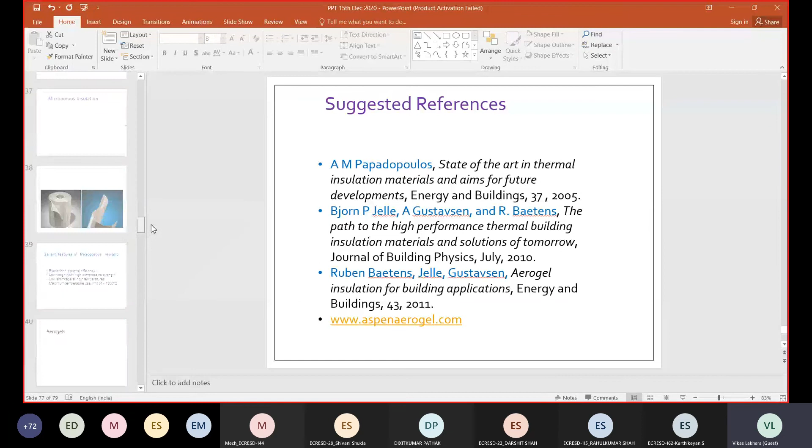Oh. Yeah. So we find that in most of the materials, like, yeah, hello.

This is Karthikeyan from Cuddalore, sir. Yes sir, how to calculate the PU insulation thickness required to cover a flat plate solar collector, sir? Normally we arrive at the value

from the thermal resistance given by the manufacturer. So what is the technique we need to follow to arrive at the exact thickness requirement, sir? You should set the temperature of the surface which you want to achieve.

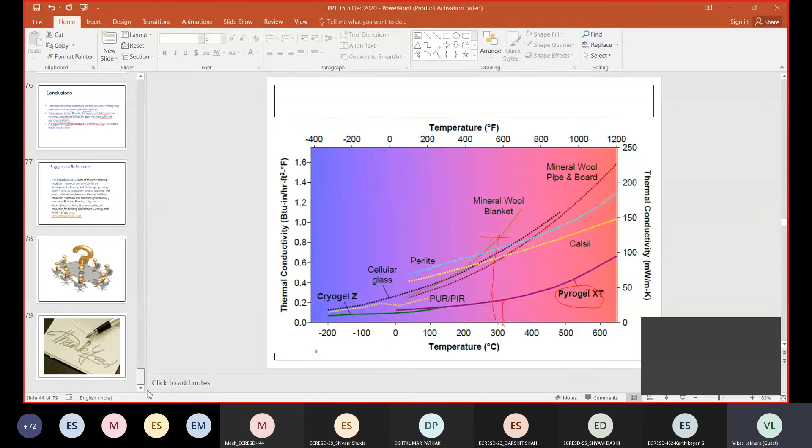So if you set the surface temperature you want to achieve, you can calculate the thickness that will be required. Is there any relationship available for that, sir? Any formulas? You can do it from basic calculations of heat transfer, just fundamental calculations.

Okay sir. When we design green energy systems involving PU foam as an insulation material, people object saying that PU foams are not eco-friendly. So in such a case, what is the most popular eco-friendly insulation material available with the least thermal conductivity, sir?

Actually, if you see organic materials, like your newspaper, paper has cellulose and those kind of things. Coconut fibers too. So if you talk of green materials, these are the materials, but the only problem is their conductivity will not be as low as foam. Foam conductivity is typically in the range of 0.02 to 0.03, whereas materials like wool, paper, or coconut fibers will have conductivity from 0.1 to 0.2. So you get an order of magnitude difference here.

But though these are eco-friendly, they will not have that problem. But foam, of course, is a kind of synthetic material - you can say it's a kind of plastic in a way. So that means there are no eco-friendly materials available to match the thermal conductivity levels of PUF, am I right sir?

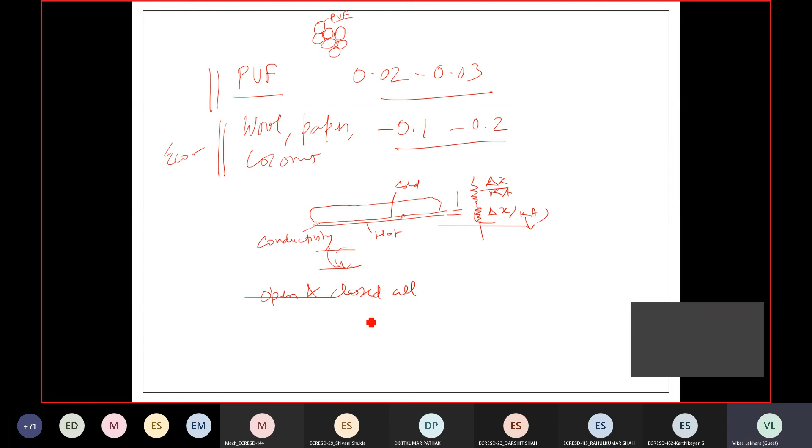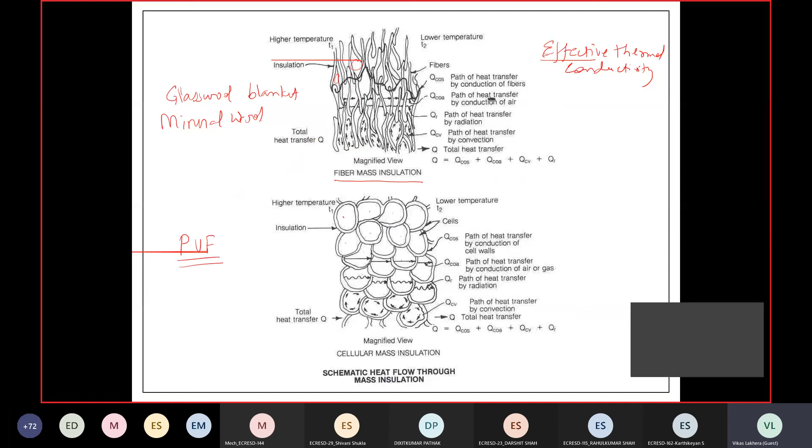Here the high density foams are there, but as I told you, if you remember this diagram, if you make this smaller, so how is your structure? If you make this very small, so your density, if you go for low density foams, then definitely your structure is bigger as compared to the high density.

So smaller structure, but along with that also the open and closed cell matters. If these paths are open, air will also be moving from one side to another, so this will be conducting the heat. So what is the open and closed cell? That is also one of the important factors along with the density.